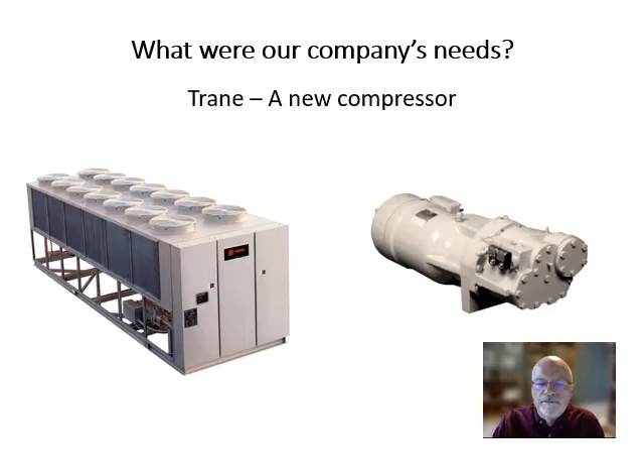John Holroyd founded his company around 1861. Not much is known about him, but we do know he had personal connections with Joseph Whitworth, and that his company made a wide variety of precision machine tools. Then, as a result of an interesting collaboration with SRM in Sweden in the 1950s, they developed the first rotor milling machine for Howden in Glasgow. They soon went on to supply machines and rotors to other companies who started making screw compressors under license from SRM.

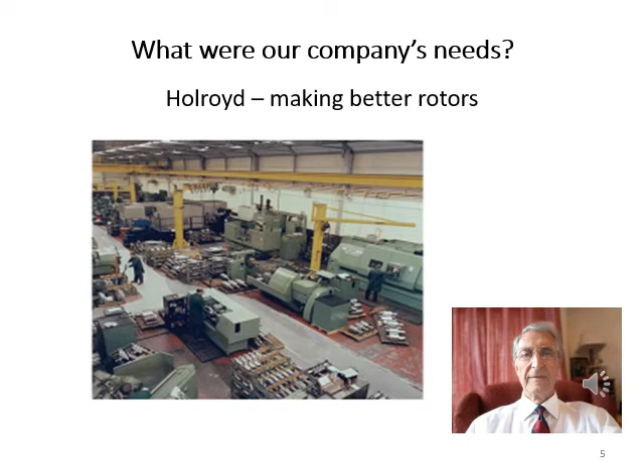Rotor accuracy was crucial to compressor efficiency and reliability, and this had two requirements: accurate manufacture and accurate measurement. Holroyd's machines were built to a high standard of precision in all linear and rotary axes to achieve accurate helical movement of the rotor past the cutter. Cutter profiles were accurately ground using another dedicated Holroyd precision machine in combination with specially developed software for creating profiles to any design.

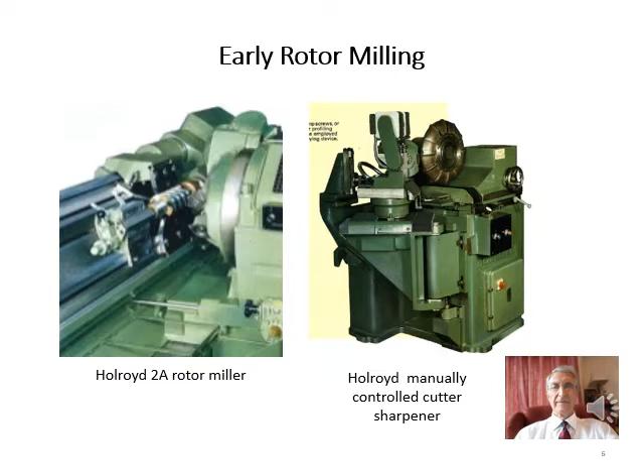Rotor tolerances were gradually getting tighter, but a persistent problem in the industry at that time was the lack of an accurate and repeatable method of rotor measurement. Clearance measurements were made using feeler gauges by highly skilled inspectors. The information was interpreted to indicate any adjustments needed to the tool shape and machine settings, but the method was only reliable to around 15 microns. This problem had to be addressed.

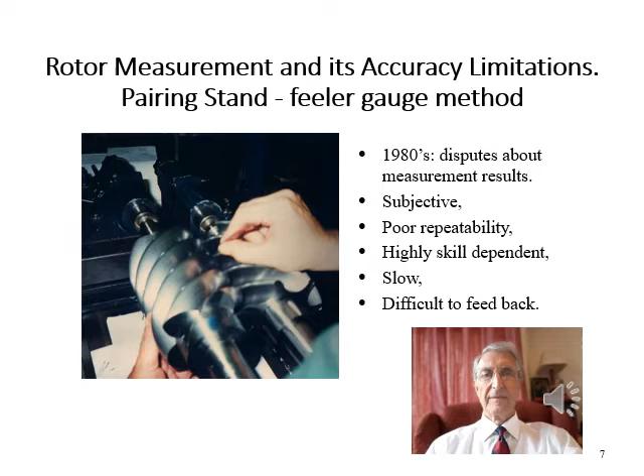Much of my time was spent on the assignment I had to develop a thermodynamic simulation for this new-to-us screw compressor. I thought it would be easy. I was wrong. I knew what I knew, and that was thermodynamic simulation. I had already developed a model for scroll compressors. But I quickly learned that I did not know the intricacies of rotor profile geometry. The roadblock was a mathematical analysis of profiles and the resulting characteristics of rotor pairs, things I would need for the simulation. I was struggling.

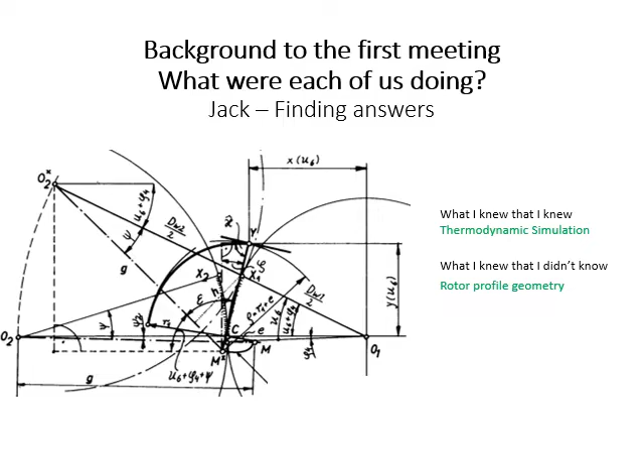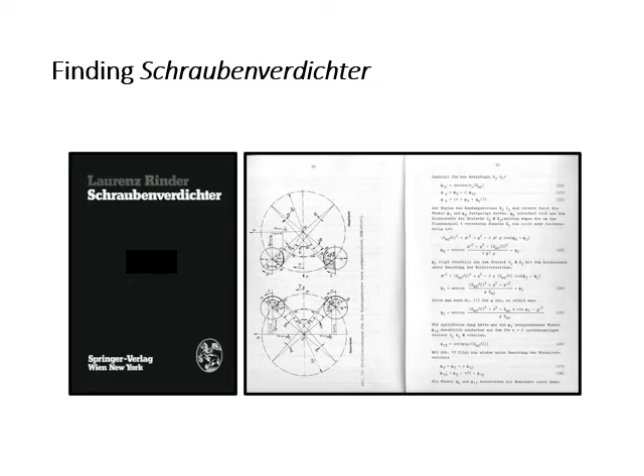Then, doing literature surveys in 1982, I found the book Schraubenverdichter by Professor Laurenz Rinder. I got a copy through our library, and as soon as I opened it, I could see it had just what I needed. It changed everything. I met Laurenz at the Technical University of Vienna and asked if he would teach us to design rotor profiles. I was impressed when he said, "I can teach you how I do it."

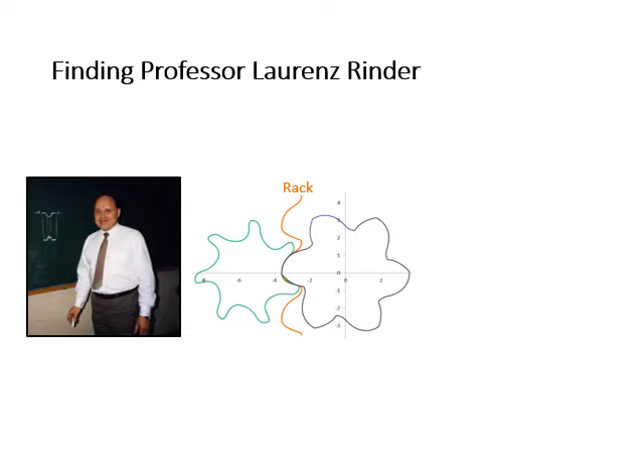In his book, he described a process where some elements of the profiles are specified from which, according to laws of gearing, remaining elements could be generated. But his approach in practice was to start with the basic rack, a shape conjugate to both rotors. I asked him why. He told me something I did not know that I didn't know. A good design will always consider the manufacturing process, and the rack is a surrogate for the profile cutting tool.

Laurenz spent 2 months in La Crosse teaching and guiding us in execution of the first Trane design rotors. When we were done, Trane ordered prototypes from Holroyd.

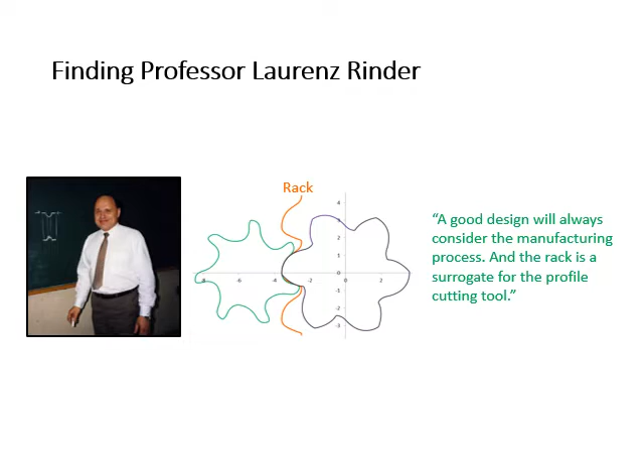After a decade teaching maths, physics and technology in schools, I was looking for a new challenge and applied for the PhD project under Bob Munro, and much to my surprise was accepted. This led to my first involvement with the company. Bob had an industrial background before and after his time at Cambridge and believed in the need for academics to address real industrial problems. He introduced us to the idea of transmission error, which is a source of noise in gears and, as we soon learned, in rotors. I knew nothing about screw compressor rotors.

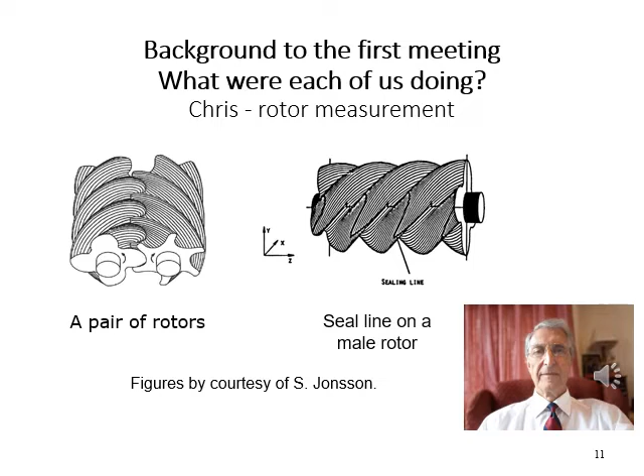After spending some time on the shop floor and considering measurement options, the idea of using light was suggested. It seemed worth exploring, but I had to find if the viewing angle for all points around the profile was constant or varying. If the latter, the method would be impracticable. Mathematical modelling was required, and with the help of the university's computer centre under Bill McTaggart and many late nights, I eventually came up with a transverse model that showed the viewing angle to be constant for every point around the seal line.

The key to this was the discovery that it was possible to construct a curved line which could be passed through the gap between the rotors in the direction of the tangent to the helix at the pitch line contact point. After months of head scratching, this was the light bulb moment. I then learned from Bob that my curved line was known in gear circles as the basic rack, which Jack and Laurenz Rinder had found key to their own developments.

Consider conjugate profiles in the transverse plane as shown. In general, the profile of one rotor may be chosen arbitrarily and the conjugate profile for the mating rotor developed. But for any pair of conjugate profiles, there also exists a basic rack form, which is the conjugate form of a rotor of infinite radius. It can be derived from either rotor, and its pitch circle is a straight line.

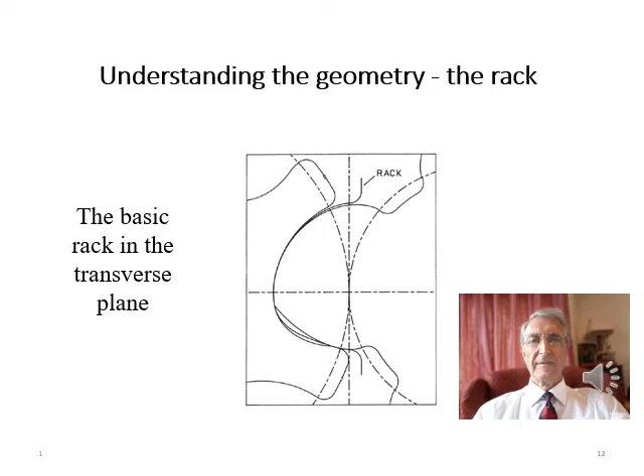As the profiles rotate, the rack is translated in a direction perpendicular to the line of centers. But if the rotors are kept stationary and a succession of transverse profiles along the z-axis are viewed instead, as shown in the diagram, the results are identical. So the rack generates a curved shape consisting of lines parallel to the pitch line helix, all of which are tangent to the rotor surfaces at the seal line.

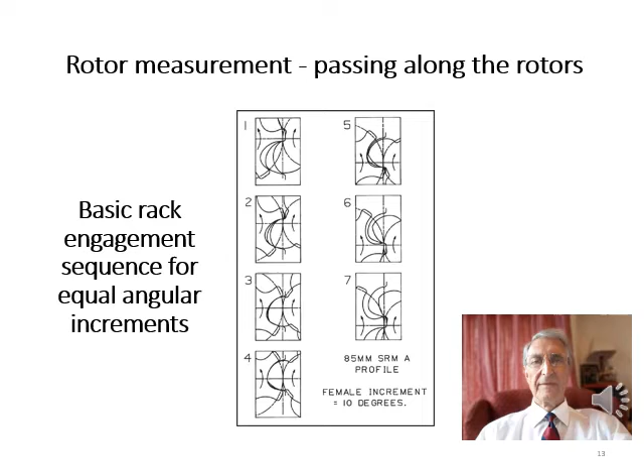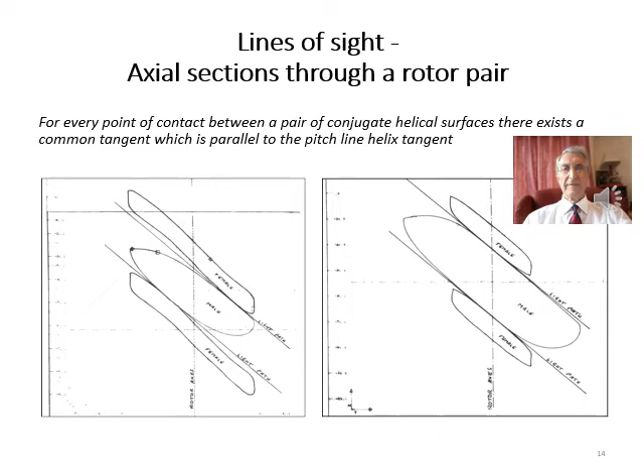In other words, for every point on the seal line between a pair of conjugate helical surfaces, there exists a common tangent which is parallel to the helix tangent at the pitch line. For each and every axial section through the rotor lobes, these tangents are the lines of sight, as shown. In the left diagram, the female lobe curves back rather threateningly towards the line of sight, but does not touch it.

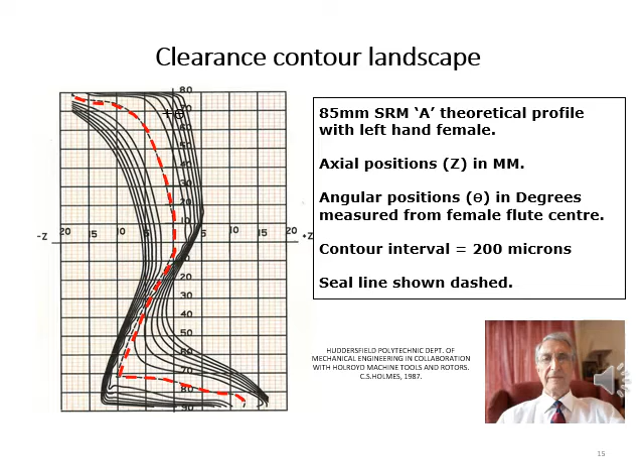But then, my light bulb moment turned into bigger light problems. The three-dimensional seal line and the curved surfaces around it were a source of major optical distortions due to the effect of near-parallel reflective surfaces on the passage of the light. Fortunately, after nearly 2 years at the university's optical bench, these were overcome, and the work eventually led to a novel measuring machine, a world patent, and several published papers.

Chris and I worked together in a collaboration that was characterized by an informal agreement between our respective companies, to support an ongoing dialogue between us and the efforts that might arise in the process. The foundations for this approach stem from viewpoints held by the two companies' management. Trane's engineering leader, Dave Eber, supported the principle of Trane being accountable for its products and was committed to a future where our engineering team would be responsible for all aspects of the compressor design.

Holroyd's managing director, Ronnie Kershaw, encouraged his engineers to get a fundamental understanding of customers' problems and needs. He said, 'One has to make friends before making business.'

I made my first visit to Holroyd's offices and factory in Milnrow in 1989. There I met many of the people I would work with, including Chris and tool designer Jack Sauls. Both would play roles in this story of our soon-to-be-born collaboration. And of course, I met our first Trane rotors for the first time.

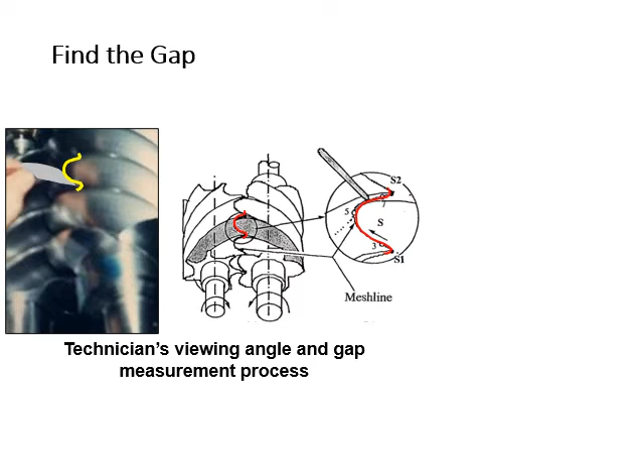Our focus was clearance data for the rotor pairs in our order. We spent a good deal of time on the shop floor watching technicians as they demonstrated the process. They would spend a bit of time finding the right view, locate a point we had specified, measure the gap with feeler gauges, and record it on an inspection form.

We talked about clearance results, but more importantly began to dig into why they were as they were. They're important for compressor performance and reliability, these factors being at odds with each other over what the gap size should be. As we talked, Chris and I noted that although Holroyd manufactured rotors, we were judging them by the gap that only exists when they're paired.

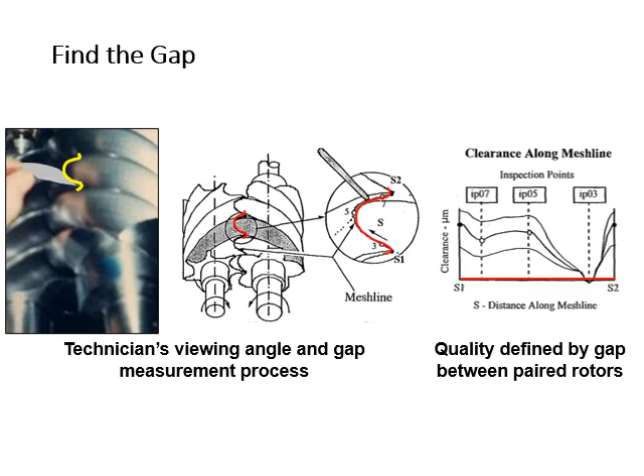We would need to understand the design and manufacture of individual rotors if we were to achieve proper clearances in rotor pairs. And at one point, Jack Sauls offered this opinion: 'This design is easy to make.' We would need to understand this in order to have it as a design intent.

My engineering manager, Pete Leonard, was with me on my second visit in 1990. He met Chris and Holroyd's managing director, Ronnie Kershaw. Here are some excerpts from Pete's trip report on that visit.

Chris is very competent and works well with everyone. He added Holroyd values Jack's input to Chris's clearance measurement project, and we, Trane and Holroyd, intend to support them by means of a dialogue between Chris and Jack.

And finally, he noted, Ronnie arranged for us to spend a full day away from the plant with Chris so as to get to know him better on a personal basis in order to facilitate communication. This last statement embodied Ronnie's principle that one had to make friends before making business.

The collaboration was as formally recognized as it ever would be. There wasn't a plan, no stated outcomes, no budget. Its primary aim was for Trane and Holroyd to have the right people together when and where it would be most beneficial to the separate but intertwined company goals.

Trane's inquiry for prototype rotors from Holroyd was the beginning of a most interesting and fruitful collaboration. Ronnie Kershaw saw an opportunity to invite Trane's expert Jack Sauls to see our methods and discuss ways forward which would benefit Trane's business and ours.

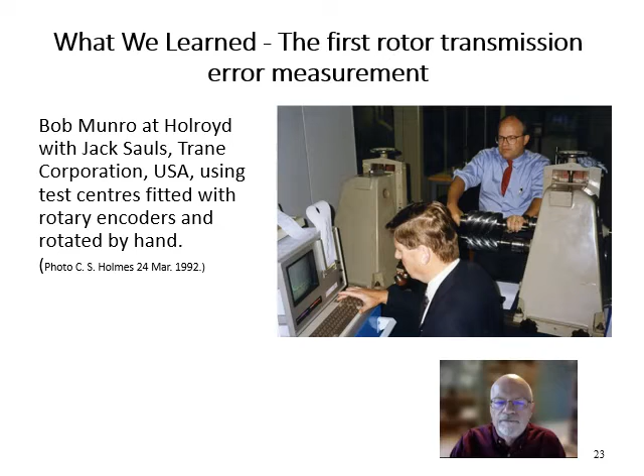Transmission error occurs in the driven component of a rotating pair of gears or rotors when its instantaneous angular position differs from the theoretical angular position determined by the gear ratio.

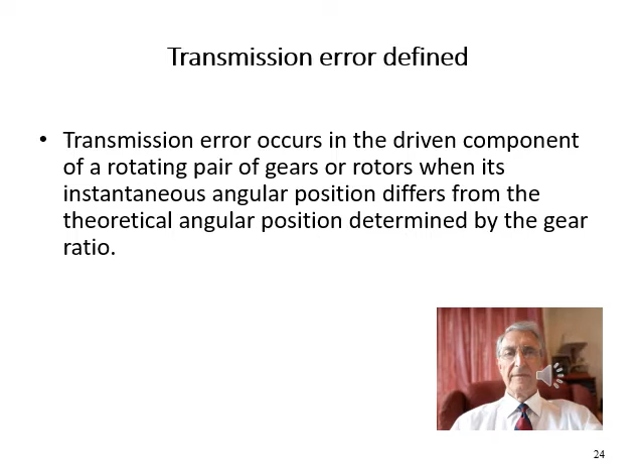It was possible to plot the forward transmission error, shown in blue, reverse transmission error in green, and backlash in black over a full engagement cycle. The errors shown are from geometrical errors in the rotors. This data was then processed using Fourier analysis to predict the rotor-generated noise to be expected in the compressor.

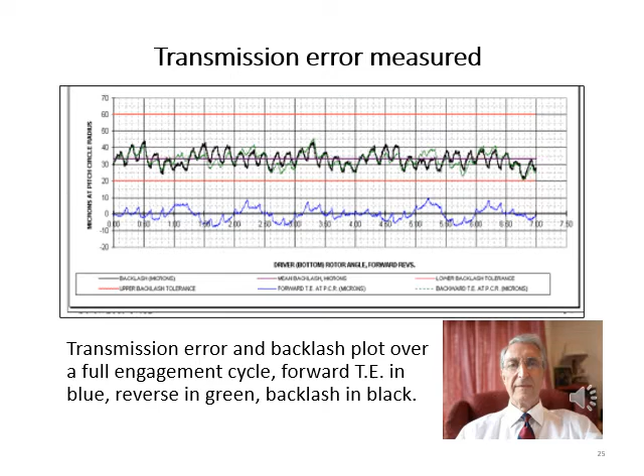There were two interesting things we learned in the test program Chris mentioned. Holroyd made and measured several crowned male rotors paired with a single uncrowned female. That data showed crowning's effect on the magnitude of the transmission error and that there was an optimum crowning.

Trane subsequently measured sound levels of a compressor with several of the rotor pairs installed. This data showed that crowned rotors could provide a noise reduction on the order of 3 decibels.

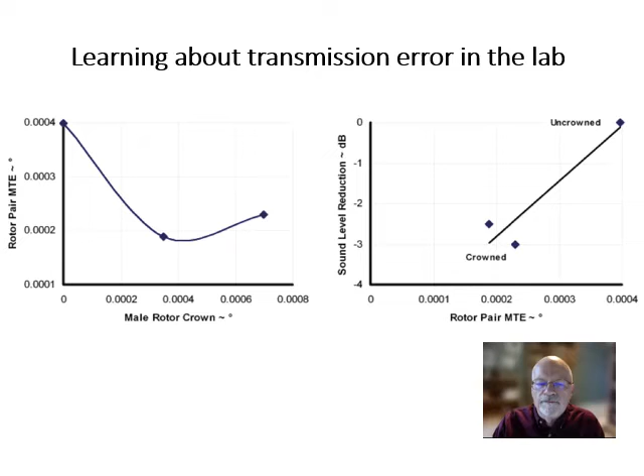Holroyd and Trane had learned and put into practice much from the work carried out by Bob and Chris. The benefits were confirmed in a similar collaboration some years later with another major US compressor company who measured a noise reduction of 6 decibels. They bought the fully developed machine.

But in addition to manufacturing deviations in the rotors, there are other sources of transmission error in a working compressor, as identified in items 7 to 10 here.

In a collaboration with Mayekawa, Japan, all the deflections and misalignments were carefully estimated in advance. The rotor leads were then modified accordingly to minimize the predicted noise. The results were published in a joint paper by myself and Koichi Matsuo at this conference in 2013.

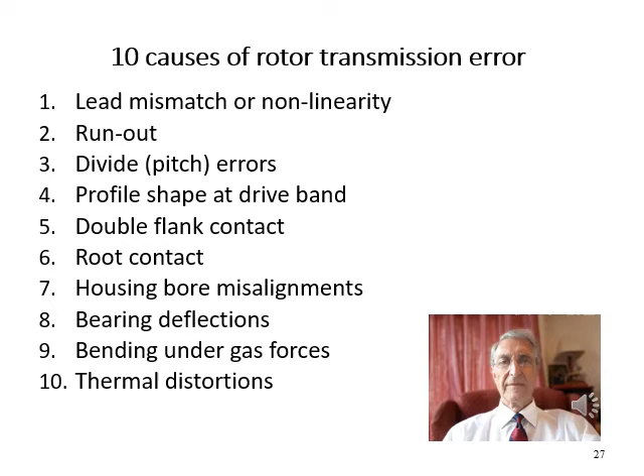The eventual machine was fully automated and named ARAC, Automatic Rotor Analysis Center. After a full statistical study, its measurement capability was shown to be well within the needs of manufacturing and was at least 10 times more accurate than feeler gauges. It was the subject of several conference publications, including Purdue Compressors in 2004.

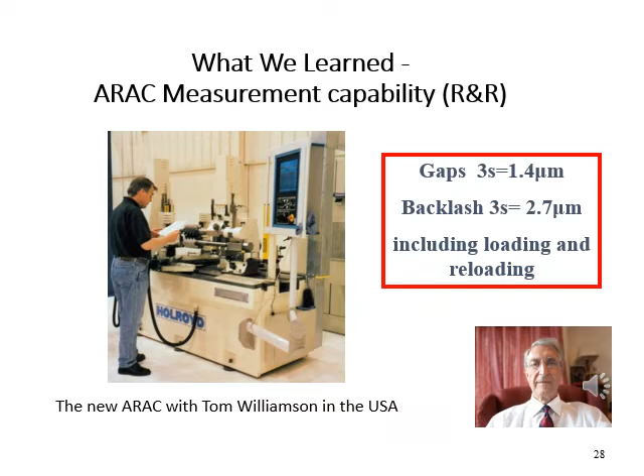To quote Jack: "Whether made as pairs or individuals, the quality—that is, suitability for purpose—of screw rotors results primarily from the geometry of the gap between them. The gap determines efficiency, reliability, and noise."

Almost every profile design received from customers had one or more problem areas which had to be addressed. Otherwise, the profiles were either impossible to manufacture or would not give the clearances specified, and the rotors would be rejected. Sometimes rotor shapes had tight corner radii which could not be achieved or which caused excessive tool wear and frequent costly resharpening and replacement of the milling blades.

Holroyd engaged the mathematical wizard from the Machine Tool Industry Research Association, MTIRA, to write the necessary software, CoPro, to calculate tool profiles and to correct rotor profile errors so that workable tooling could be made, giving rotors which would have the required clearances. Customers were not usually involved in or even aware of this process.

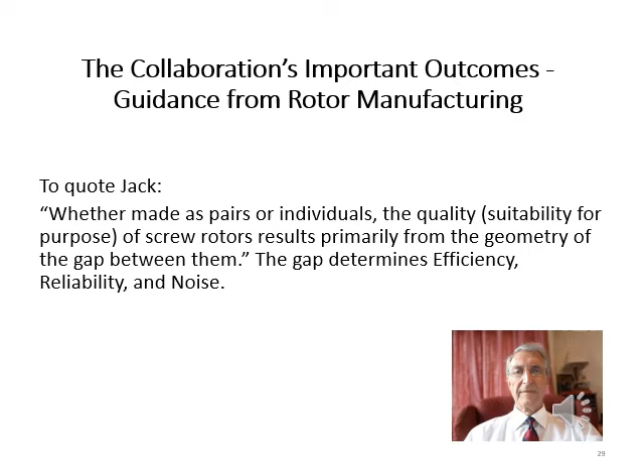Fortunately, Trane's profiles did not have such problems. Our collaboration spanned 10 years. It had several threads and many aha, light-bulb moments. Many of those happened simply because I had the opportunity to be at the offices and rotor shop in Milnrow. Every visit had a main reason, but significant benefit came from unplanned gatherings of interested parties from our two companies. The framework for most gatherings was the process for designing, ordering, and making profile cutting tools, and then the rotors themselves. So I'd like to share a few instances of these unexpected but beneficial consequences of being together.

In the beginning, work flowed this way: Trane's profile design was communicated to Holroyd in a table of coordinates. Holroyd converted these to a format they required, dictated by the program called CoPro at the time that would calculate the cutter profile. We had sent data several times, but it was only because of a more or less casual comment made by Mike Smith during a visit that I learned of this conversion.

It was never mentioned to us because Holroyd felt that if that's the way the customer wanted to provide the information, then they would accommodate it. When I mentioned I felt that Holroyd should specify precisely what they would need so that we could provide the data in that format, Mike's response was, 'No one ever asked us what we needed before.'

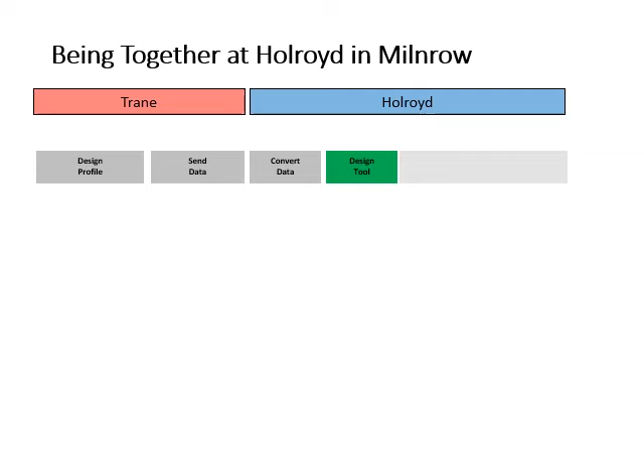But that's what we did, and we began providing converted data directly to Holroyd without requiring them to do the conversion.

We'd also learned that it was possible to design a rotor profile for which a rational tool form did not exist. When Holroyd found this to be the case, they would inform us and we would work together to redefine the profile details.

It occurred to me that if Trane had a copy of CoPro as part of its design system, we could find and fix at least some of the issues before sending the data. We were never going to be tool designers, but we agreed that this would be beneficial for both companies.

It wasn't necessarily easy. CoPro wasn't a product at the time, but we made the arrangements, got the training, and eventually embedded it into the process.

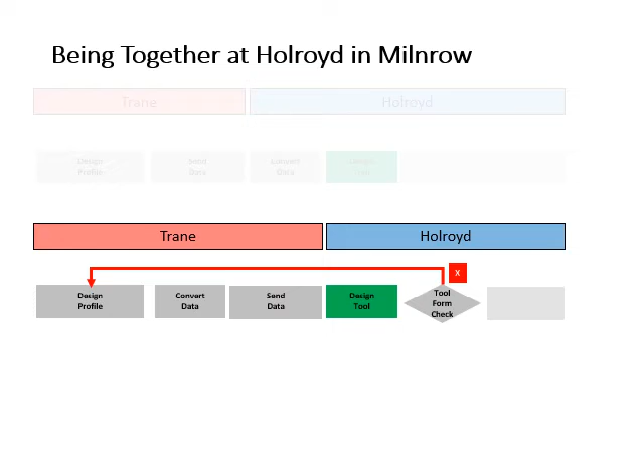So we ended up with something that looked like this. We would design the profile, convert the data, and run CoPro to do the basic checks on tool quality. When we were satisfied, we would send the data.

Holroyd would design the tool and make the tool, and then we could get on with the job of making the rotors.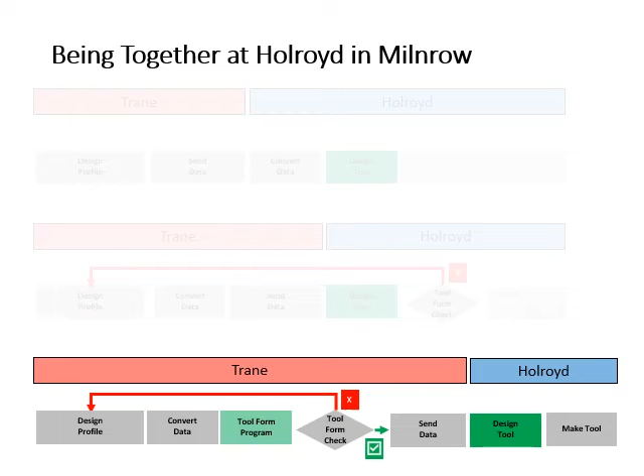Making a rotor requires first making a wheel with the tool profile. This is mounted in a multi-axis machine where the rotor is milled or ground from a solid workpiece. The machine's axes are adjustable to locate, orient, and move the wheel relative to the workpiece, producing a three-dimensional multi-lobe helical screw rotor.

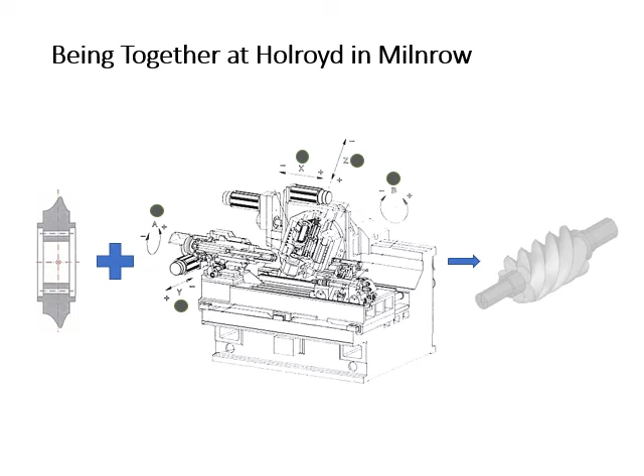It's probably obvious, but if the cutting tool and the machine settings are precisely in accordance with the design, the profile on the rotor will be as specified.

That's true, of course, but in practice, this result is rare. Holroyd made many rotors for Trane, such as those with our transmission error study.

In the real world, experimentation is time-consuming and expensive, so much so that studies are necessarily limited in terms of alternatives and number of samples.

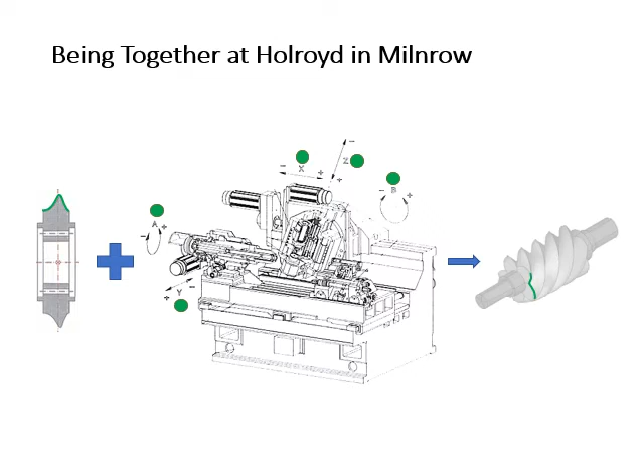But there was this. CoPro, which calculates a cutting tool form and attendant machine axis settings from a rotor lobe profile, could be run in reverse. Given the cutting tool shape and the machine settings, a computational process can be executed to provide the rotor profile.

Even with a perfect tool profile shape and a perfect rotor blank mounted in the machine, there were errors which appeared during manufacturing caused by misalignment, run-out, or deflection of the rotor during cutting.

CoPro was later adapted by Holroyd's Alan Stephen for modeling the entire machining process. The software was made available for sale to machine tool customers only under the name HPMS, Holroyd Profile Manufacturing Software.

But some years later, Jack and colleagues came to question us about what appeared to be systematic rotor profile errors. The outcome was significant for both companies, as the investigation led to the surprising conclusion that a perfect milling tool shape did not guarantee a perfect rotor profile.

Constant bulges on the round side of the male profile were baffling all concerned, and had certainly been unknown unknowns.

Alan Stephen decided to make geometrical calculations of the lengths of the tool's contact path with the rotor and found that the lengths were quite different around the profile, which almost certainly explained why more metal was removed in those areas with longer contact paths.

As these effects could not be avoided but were constant, a systematic compensation method was developed using geometric software specially written. This used an imperfect tool profile to produce a perfect rotor profile.

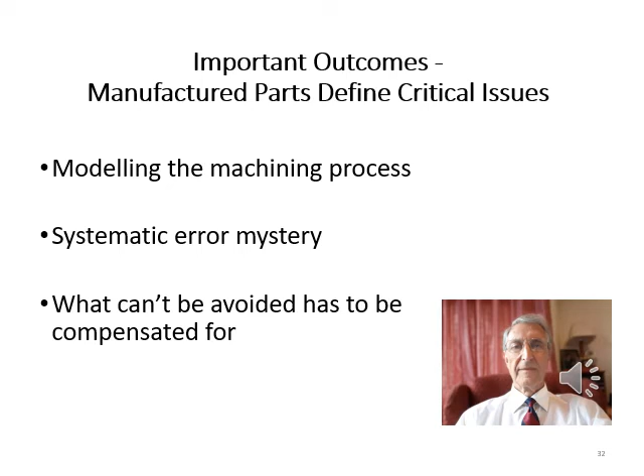In the case of dressable grinding wheels, these corrections could be applied to the profile shapes without unloading the rotor. A relevant paper was published in the ASME Nevada conference proceedings in 2007.

To address the limitations inherent in hardware testing, Trane developed a virtual manufacturing process. Here we have control over the tool form and machine settings and can carry out all manner of investigations.

It was very instructive to run tests of the effect of deviation of each axis on the rotor profile individually. An offset in a setting produced very distinct signature profiles. This simple example is from a study I reported at the 2000 Purdue Compressor Conference, where we can see the effect of a shift in just one axis setting, the angle B.

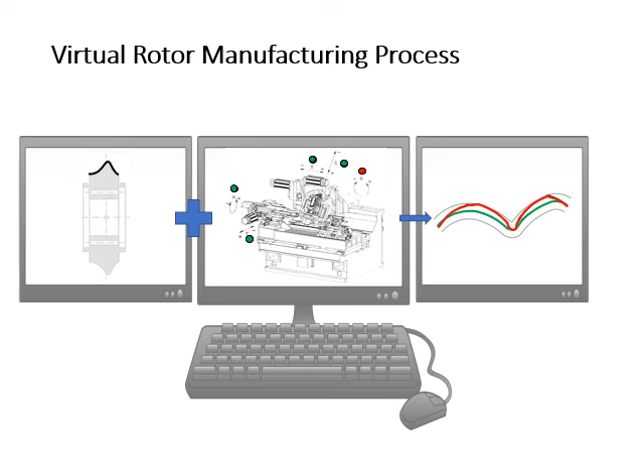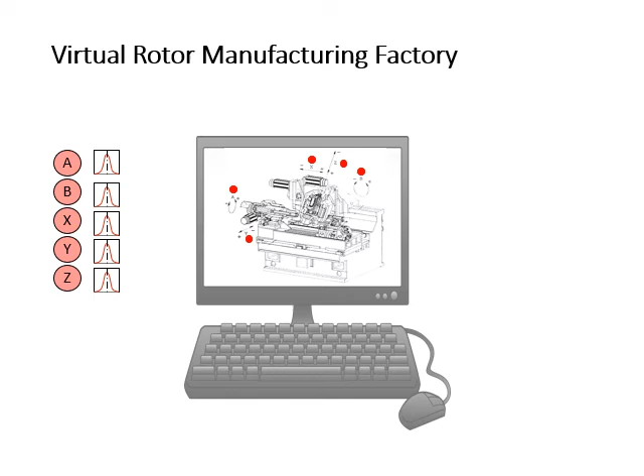The tool allowed us to look at other, more complex and important questions. For example, what variations will the rotors face during production, and how will different designs react? Holroyd provided guidance on what we might expect these variations to be, their magnitude, and what form of statistical variation they may take. With that, we proceeded to simulate production runs of 1,000 rotors.

There was a virtual coordinate measuring machine within this factory to examine each sample and record information about its deviation from the design, identifying rejects, cases where profiles fell outside of our tolerances. These exercises were very informative.

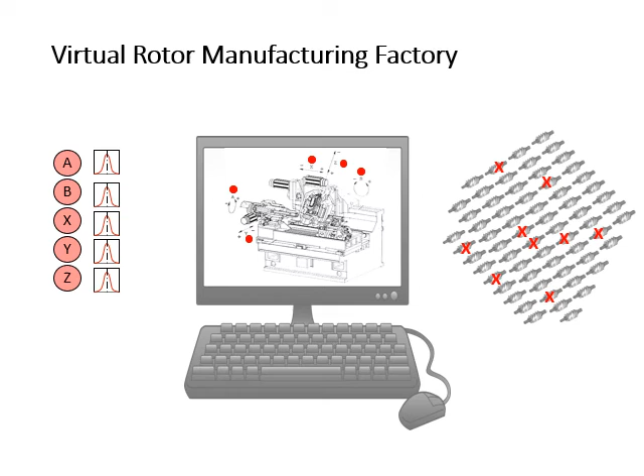I must add here a nod to Professor Nikola Stosic. In order to get the function we needed, we had to embed the calculations of the tool form to the rotor form in our programs. This was something we couldn't do with CoPro, but Nikola had a startlingly short piece of code that we acquired that handled the task perfectly.

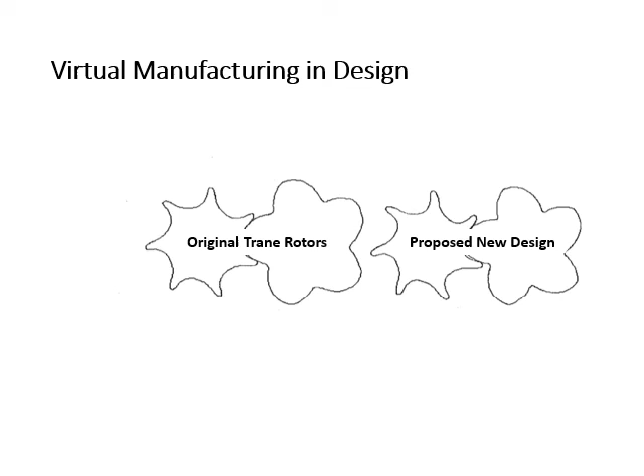The original Trane rotors had been in production for some time when a new project gave us a chance to consider another profile and the opportunity to use the virtual factory to assess manufacturing issues. In the study, we ran 1,000 samples each of the male and female rotors.

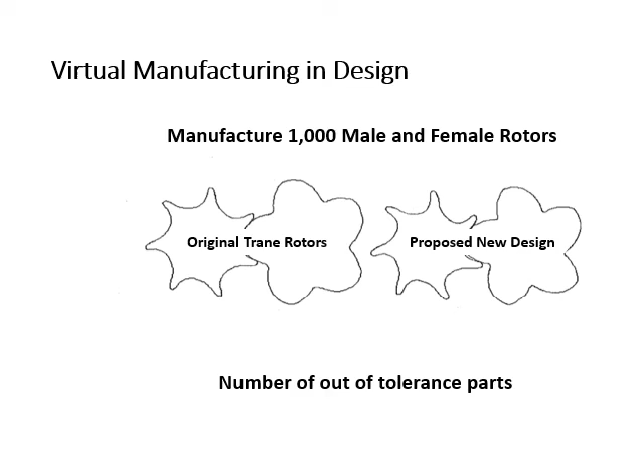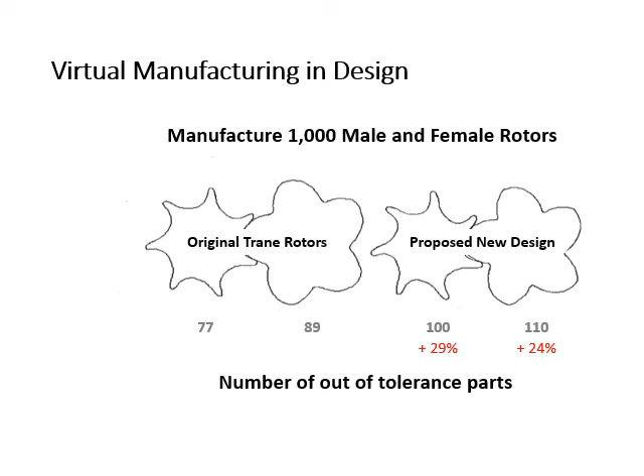Machine tool variation characteristics were guided by Holroyd. The criteria for comparing the options was the number of out-of-tolerance parts. For the original design, 77 female and 89 male rotors were unusable based on exceeding profile tolerances. With the new design, there were 100 female and 110 male rotors failing to meet the criteria. Overall, this was a 26% higher rate than with the original design.

When Jack Hughes commented about the easy-to-make nature of our original profile, he explained it was because the rotor shop experienced less scrap and fewer reworks caused by out-of-tolerance parts than was the general experience. Years later, we were able to consider manufacturing in the design and could quantify Jack's observation of easy to make. I wish I could have the chance to show him these results.

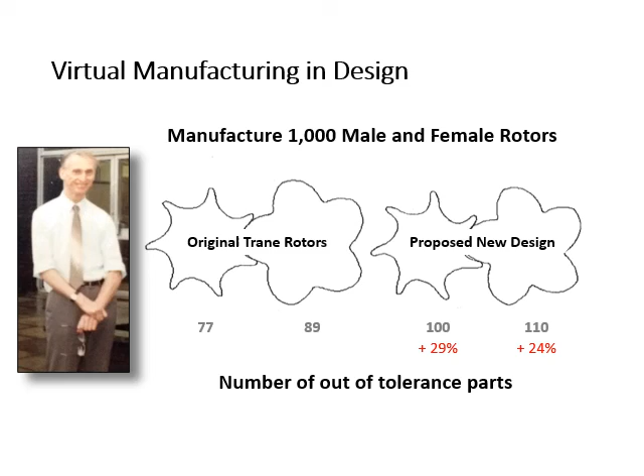We hope that by reflecting on our own collaborations and sharing insights, we may have been able to inspire and inform future collaborations between companies and universities for the benefits of both. For engineering experts, we encourage you to seek and advocate for meaningful collaborations, even those that might be outside the lines in current organizational process guidelines. And to managers, encourage and support these ventures.

We hope we've convinced you that in the pursuit of engineering knowledge, one can't easily do it alone. A willingness to collaborate rather than compete can lead to identifying the unknowns and then to light bulb moments of discovery, resulting in both design improvements and manufacturing improvements with strong mutual benefits.

We've shared a collaboration between ourselves and our companies, but we both also have experience with supporting, attending, and contributing to engineering conferences. It's rare that attending one conference will bring the answer to the current big issue. Rather, regular attendance and interaction with peers is a form of ongoing collaboration, and we encourage students, engineers, and leaders to advocate for and support this. So then, when future problems arise, the individuals know they have a route to finding solutions.